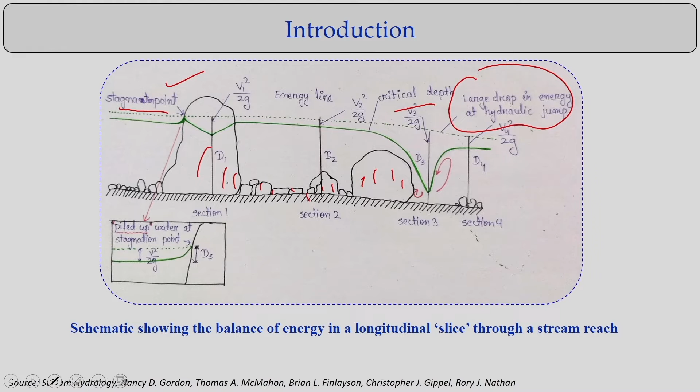Because of this resistance, we have turbulent structures and energy dissipation, which we can consider in terms of how bed roughness plays a role in creating turbulent structure as well as energy dissipation. But more details we can look at now are the critical depth and hydraulic jumps, which are quite related to each other.

Before that, you know from fluid mechanics that the flow Froude number is the ratio between inertia force and gravity force. If I consider a channel having flow depth h, velocity v, and area of flow a, under these conditions I can find the inertia force will be rho a v squared.

Rho into q is the mass flux, into v is the momentum flux, which is equivalent to the inertia force for a flow when you have depth h moving with velocity v and area of cross section a. We can find the momentum flux will be rho a v squared, which is the inertia force divided by the gravity force.

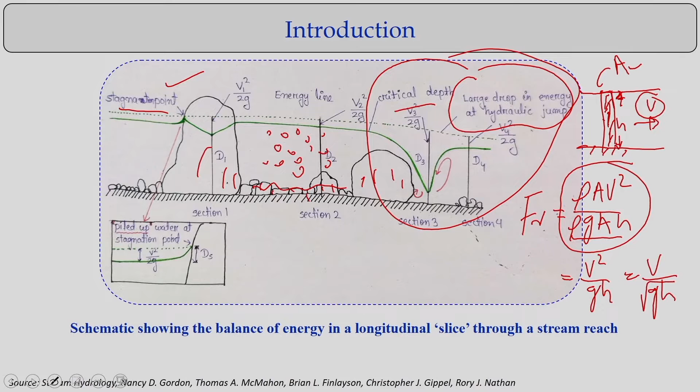If you have these components, you get v squared by g h, or v by root of g h. Please remember, it's a ratio between two force components, the inertia force and the gravity force component, considering the fluid mass moving with uniform velocity v and flow depth h, and you try to find this relationship.

So when the flow Froude number is greater than 1, or the flow Froude number is equal to 1, what does it indicate? That is the condition where the gravity force is equal to the inertia force.

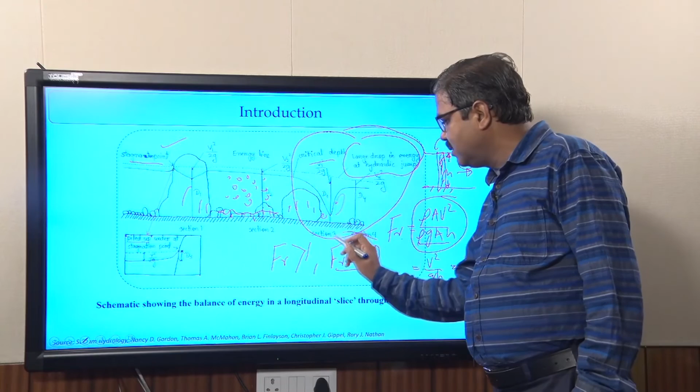That condition happens when you have critical flow, or the flow Froude number is equal to 1. But if the flow Froude number is more than 1, the inertia forces are larger than the gravity forces. The interpretation is that when flow Froude number is greater than 1, inertia forces are larger than gravity forces, and that is the condition when you have supercritical flow.

Just the reverse, when you have a flow Froude number lesser than 1, you can interpret it in terms of gravity forces and inertia forces. Inertia force is nothing else but momentum flux, considering a smaller control volume having flow depth h and cross-sectional area A, moving with velocity v.

You can easily derive the ratio between inertia forces and gravity forces. That's what gives the definition of the flow Froude number, which is discussed in fluid mechanics books, but let me explain it here.

In open channel flow or river flow, you can have a stretch with subcritical flow and a stretch with supercritical flow. During the transition from supercritical to subcritical, you will have hydraulic jump formations. That's the region where you have high energy dissipation.

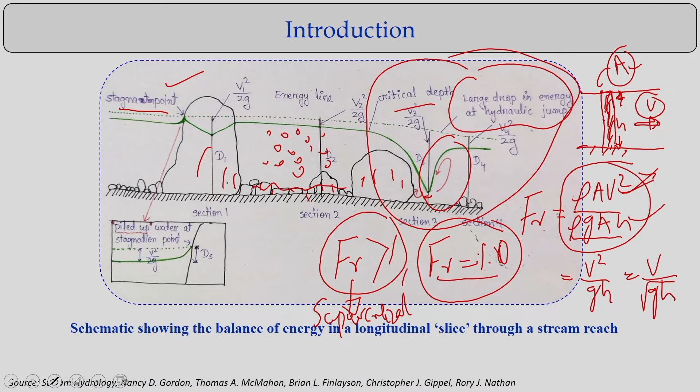So we use hydraulic jumps as a design for energy dissipation or for creating turbulent structures for mixing of fluids, or fluid and sediment mixing. We try to use a hydraulic jump as an energy dissipator, or as a mixing mechanism in flow systems. That's how we use the hydraulic jump concept.

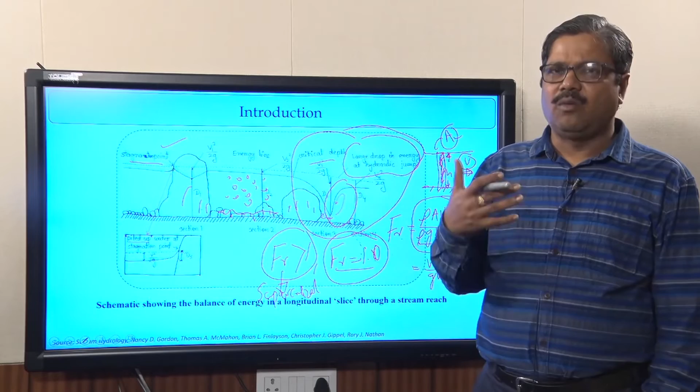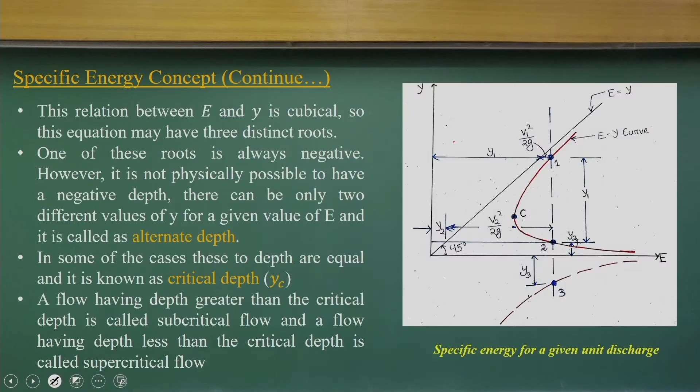But in the case of rivers, we try to understand where hydraulic jumps occur and what is the amount of energy dissipation because of the hydraulic jump formation. Let's go to the hydraulic jump part, which connects to what we already discussed about specific energy. The hydraulic jump happens when a supercritical flow changes to a subcritical flow.

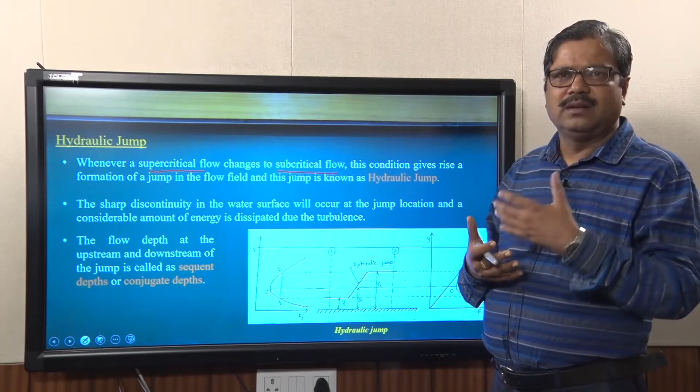In terms of flow Froude number, in supercritical flow the inertia forces are larger than the gravity forces. When that changes in terms of force, that's the mechanism that happens from supercritical to subcritical. In supercritical flow the velocity is higher and the depth is lesser. That is the condition under which hydraulic jumps form.

So there are these points. Look at the specific energy curve. If I consider y1, the energy at this point is this, and y2 is the energy here. There is an energy loss in this hydraulic jump.

There is noise, or sound production by heat energy and turbulence energy. All of this works to dissipate energy in the formation of the hydraulic jump from supercritical to subcritical. Basically we call this the sequent depth or conjugate depths. That's the theoretical point.

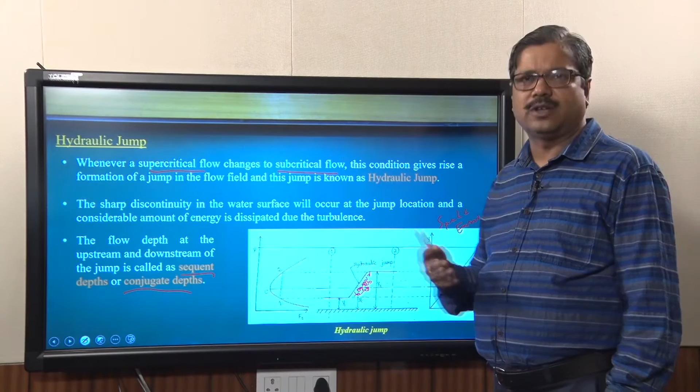I look at these hydraulic jumps as part of the specific force concept. When you consider the specific force concept, I can use a control volume like this. So when I use this control volume, we try to look at what force is acting on the control surface.

In this case, on this surface there is no force acting, and on this surface there will be frictional forces. The frictional force acting in short reaches we can consider to be zero, or negligible, not significant. If that is the condition, and here if I consider the pressure distribution to be hydrostatic, it is quite valid if there are no curvatures of the free surface -- we can assume a hydrostatic pressure distribution for this flow.

So we have hydrostatic pressure distributions. I know the pressure distribution, I know the momentum flux coming in here as y1 v1 and y2 v2 -- I know the velocity, I know the depth, and if I consider unit width, I can find the change of momentum flux happening in this direction.

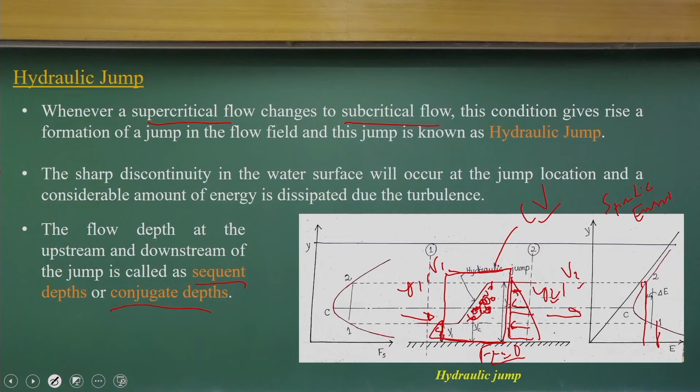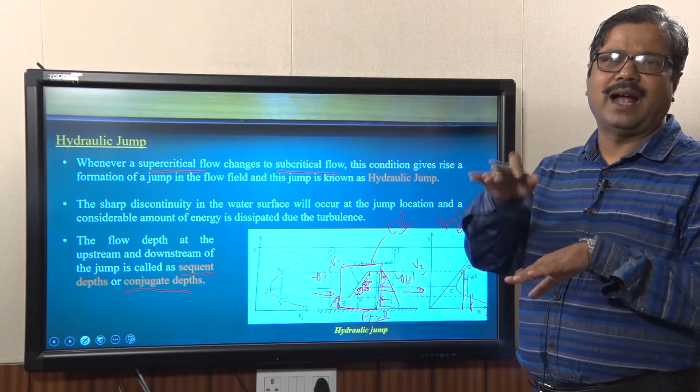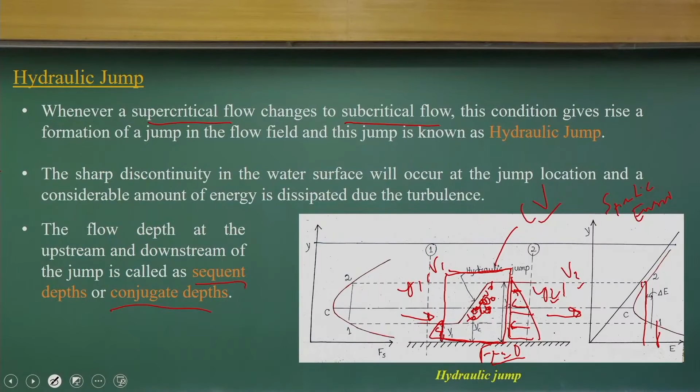That should be equal to the net force acting along this direction for this control volume. So if you apply that, what forces do we have? The momentum flux, the rate of change of momentum flux, and the hydrostatic pressure distribution -- because we have neglected the frictional force components, and there is no significant force at the interface between water and air, so we can neglect that. So we have only two force components. That is the concept called specific force.

If you look at it that way, let me again sketch the control volume and equate the force components.

If I look at this, this is the momentum flux component, and this is the component because of hydrostatic pressure distributions at section 1. That will be equal to the force component per unit weight due to the hydrostatic pressure distributions at the two locations. That relationship is nothing else but the linear momentum equations.

When we apply this for these control volumes, we get that force component per unit weight. If I define it, that is called the specific force.

What we are looking at here is these control volumes where the hydraulic jumps happen. We apply the control volume, we apply linear momentum equations, and since we consider there is no significant frictional force acting on this short reach, we can write the force terms in the linear momentum equations in terms of two components.

One is the linear momentum flux component per unit weight, and the pressure force component per unit weight. That represents the equivalent force component at sections 1 and 2, which we are equating. This is nothing else but the application of linear momentum equations for this control volume, and per unit weight, that is defined as the specific force.

So this indicates that if we consider a free surface flow where we have hydraulic jumps, we can easily find there are no significant other forces present. So we can use a very simple concept: the specific force at section 1 and section 2 should be equal.

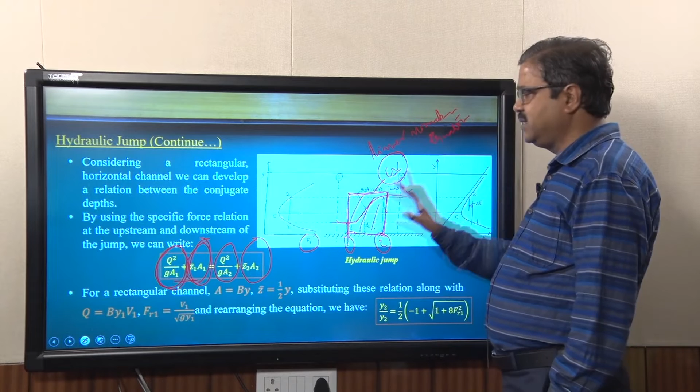The specific force will be the same, but there is energy loss due to the hydraulic jump. In the specific energy diagram, locations 1 and 2 will be at different positions, but in the specific force diagram, the specific force at 1 will be equal to that at 2.

So in case of hydraulic jumps, we use the specific force concept, derived from the linear momentum equations, because we know there are no significant other forces. We simply equate the momentum flux and pressure forces, which gives us the specific force at section 1 equal to section 2.

If you equate that and use simple geometric relations for rectangular channels, like area equals B into Y, and find the centroid or pressure centers, and use these equations along with the continuity equation...

...in terms of the upstream flow Froude number, we can find a relationship between Y2 and Y1, which is a function of the upstream flow Froude number. This is very simple - just using linear momentum equations, mass conservation equations, and the definition of flow Froude number upstream at section 1, before the formation of the hydraulic jump.

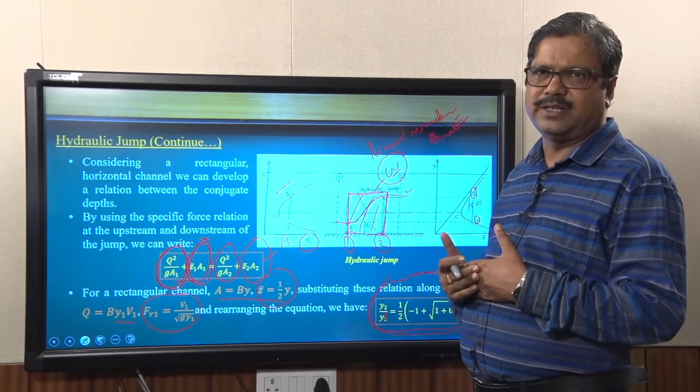Using these two equations, you can modify it to get a relationship between Y2 and Y1 - the depth before the hydraulic jump and the depth after the hydraulic jump. This relationship is a function of the upstream flow Froude number.

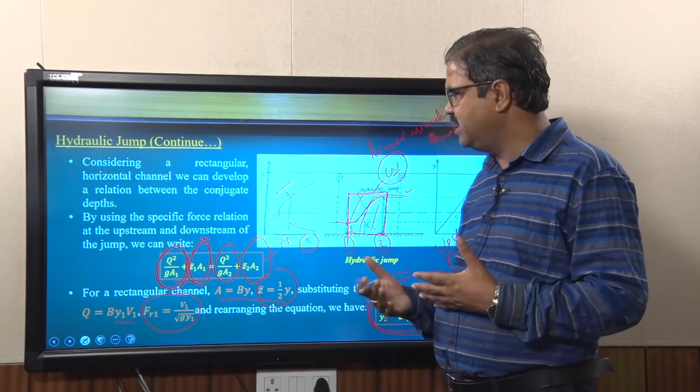Upstream flow Froude number. These are very simple concepts - we are only using linear momentum equations, mass conservation equations, and the definition of flow Froude number to derive these relationships.

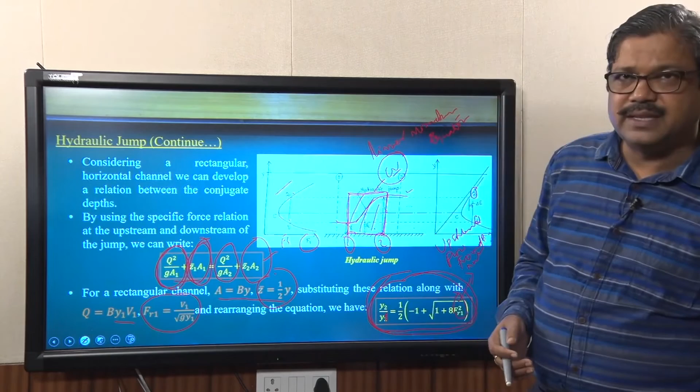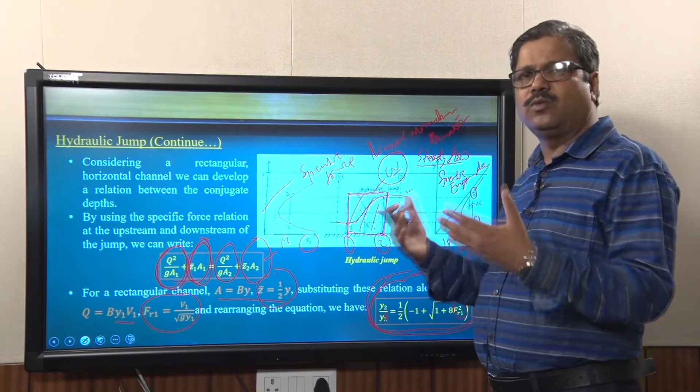These are very easy things, and whenever you solve steady flow problems, you should draw a specific force diagram and also a specific energy diagram. With these two diagrams, you try to interpret what happens pre-hydraulic jump and post-hydraulic jump, using simple tools of linear momentum equations for the control volume and mass conservation equations.

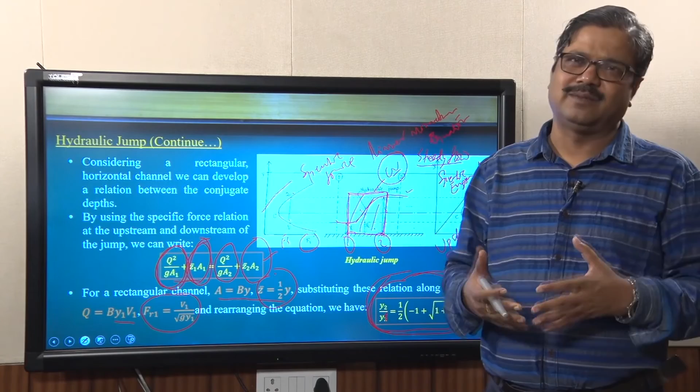We have not used any new concepts except the basic principles of mass conservation, linear momentum equations, and energy conservation for the control volume. That is what we are doing for a very simple problem - flow in an open channel where the hydraulic jump occurs.

Let us have a very simple problem to solve. A 4.5 meter wide rectangular channel carrying a discharge of 15 cubic meters per second at a depth of 3 meters.

There is a step rise of 0.25 meter in the bed. Given these conditions, determine the flow depth downstream of the step. Does the water surface rise or fall at the step?

If you look at this problem, it's quite easy. There is a rise of the bed, which could be due to sedimentation or man-made structures like a weir - the bed rises naturally or artificially. In that case, we can use the specific energy concept, assuming energy dissipation is not significant. So I can use the specific energy at two sections, section 1 and section 2.

I can compute the specific energy at section 1, and at section 2 the specific energy will be lesser than E1 because of the rise height of 0.25 meter - that's why we get this E2 value. Knowing E2, from that substitution I get a relationship between Y2 and A2. There are two unknowns, and A2 is a function of Y2, since B is known to us.

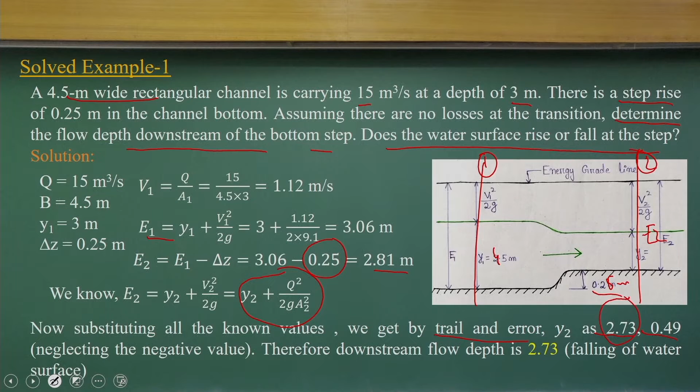Given these conditions, we can use a hit and trial method because this is a quadratic, actually a cubic equation level, and we compute it using hit and trial. It will have three values - one will be negative, which we don't consider, and another is 2.73. One may ask why we consider 2.73 and not 0.49.

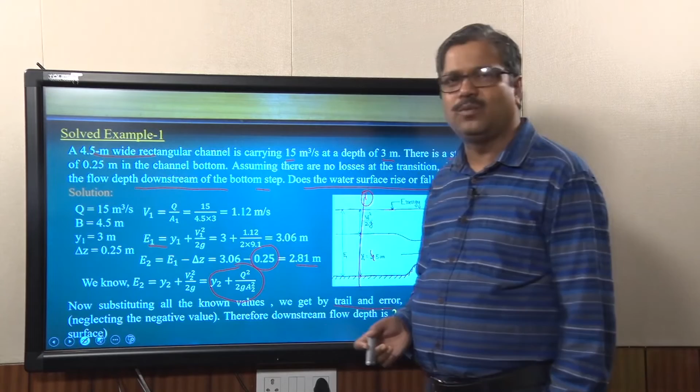That's the same concept I used earlier in the specific energy discussion - we should know whether the flow is subcritical or supercritical. If the flow is supercritical, the water level will rise. In the case of subcritical flow, there will be a decrease. In this case, knowing the upstream flow Froude number, we can compute it and find the flow is subcritical. That's why the depth will show a falling of water at the step. Just try to solve that - numerically it's quite easy.

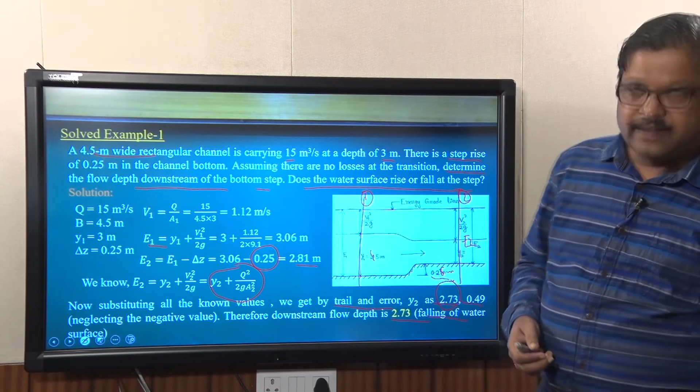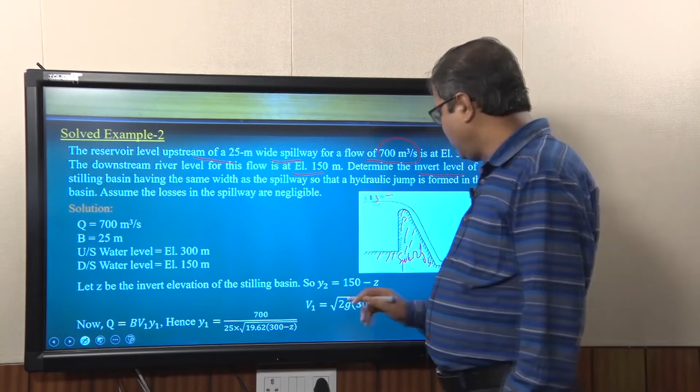If you look at this curve, it shows that the Z level at this location is unknown to us - the stilling basin bed level elevation, the invert level Z, is unknown. Given that, what could it be? If you have 150 meters minus Z, that is Y2. So you can compute V1 values - you can compute this because you know the discharge.

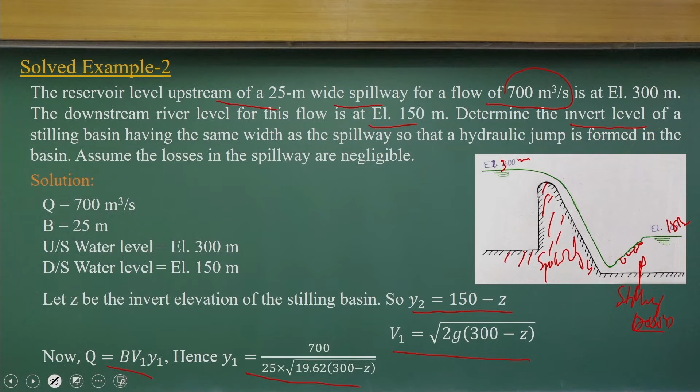So you can compute what could be the V1 value. Substituting that, you have a mass conservation equation, and you can compute what will be the Y1 value, because you know V1, in terms of Z. Then we substitute into the relation the same way - the upstream flow Froude number can be written in terms of V1 velocity, giving a relationship between Y2 and Y1, which relates to the flow Froude number. These equations are functions of Z, but you can see it is not a linear equation.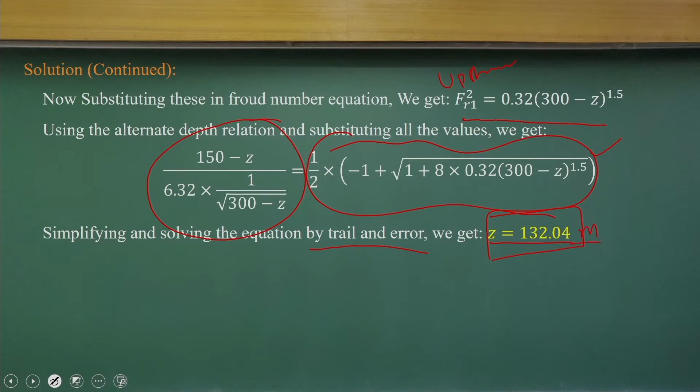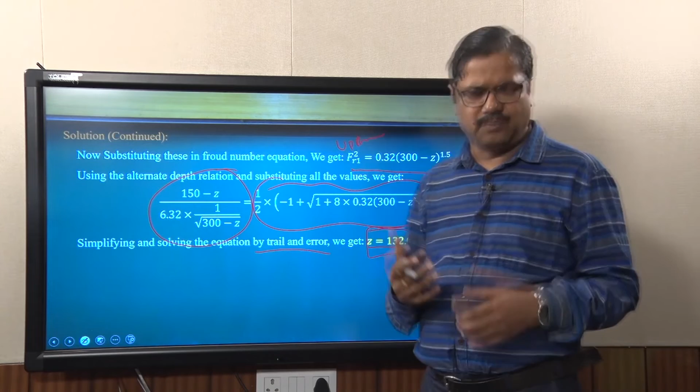So you have to do a hit and trial. There are a lot of tools nowadays available, you can use hit and trial methods to find out what could be the Z value. In this case it just comes out to be 132.04 meters. So this type of typical example we can do for energy dissipation in the downstream of a dam, or energy dissipation in rivers, if you know the flow characteristics, assuming it is a steady flow.

Now, if you look at this part, I will tell it conceptually, because this is supposed to be discussed in open channel flow, and since we are talking about river flow, it is just rectangular channels we are having discussions on, which already we have covered. If you are considering rectangular channels, you have a hydrostatic pressure distribution, and you consider a uniform velocity distribution.

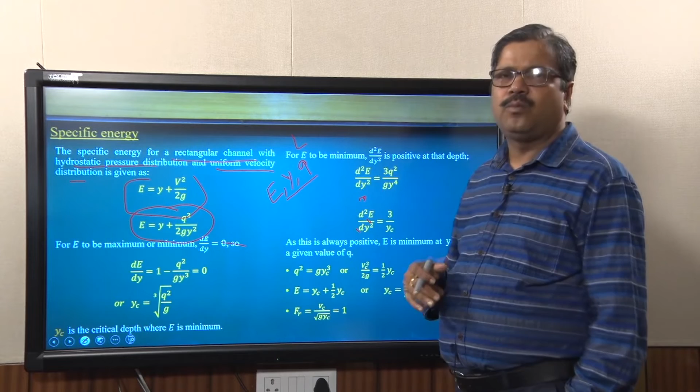So we can define the specific energy, this is just a repeat of that. Now we are using these functions. As I said earlier, in a flow we have three cases: one is specific energy, second is the flow depth, Q is the flow discharge per unit width. So basically what we are looking at is which location will have specific energy minimum. That is a very simple thing.

We know E is a function of Y and Q. If I consider Q as a constant, at what Y depth should we have E minimum? If you look at this, it is very easy because it is a quadratic equation. E has a relationship with a quadratic equation in terms of Y and Q, with Q considered constant. So using basic calculus, you find dE by dy equal to 0, and the function will be maximum or minimum at that point. That is what you compute and find that yc comes out like this.

Same way, for it to be minimum, the second derivative of E with respect to y should be positive. That is what you equate and find is always positive. And if you substitute all of this, you will find that E equal to minimum happens only when the flow is critical. That is what we did. Graphically we present this in the specific energy curve, as we discussed.

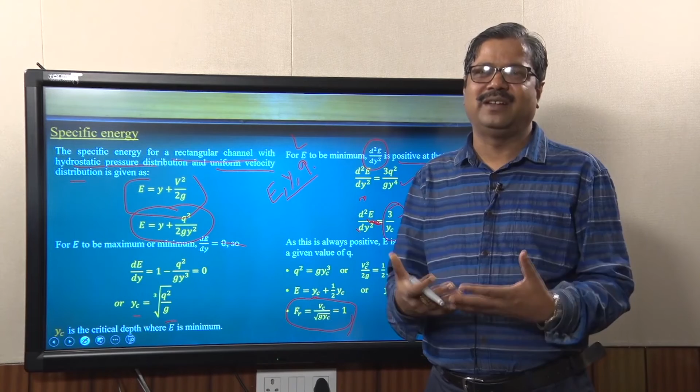That is the same concept we derived in the specific energy curve; the same thing we have given in terms of mathematical justification. Now let us discuss, as I said, we look at the specific energy, y, and Q.

So now if I consider E as a constant, that means I am considering a channel where energy dissipation is not happening yet, or is not that significant. The flow will vary with variations of y and q, where Q is discharge per unit width. That means if the same amount of capital Q is coming as the channel is expanding, the Q value at this point will change. Assuming there are no energy losses, we adopt the basic concept that if Q is varying, what will be the relationship with Y? Whether we can get a maximum discharge, the Q value, the maximum discharge value for a particular specific energy - that is the concept we are looking at.

The same way, now we are looking at the same specific energy equation written in terms of Q, the discharge per unit width, which we also define as unit discharge. Again, we said that when depth equals 0, Q equals 0, no doubt about that.

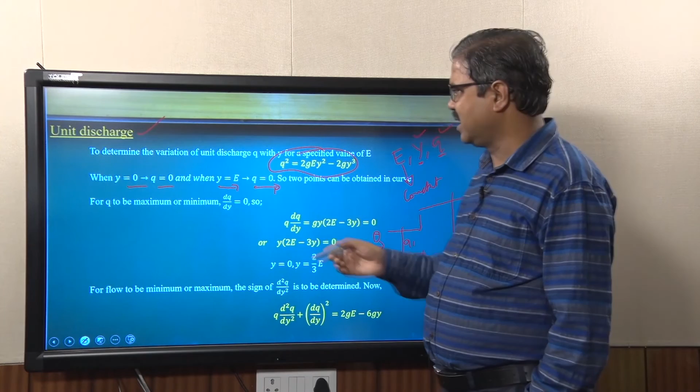These two points can be obtained in the curve, so we know these values. We are just looking at where it will be the maximum or minimum. So we try to look at the first derivative of Q with respect to Y, and the second derivative. If you compute the second derivative, it's the same equations, we are just rearranging and resubstituting, and we look at the second derivative part to determine whether the flow rate is maximum or minimum.

What we interestingly found is that if I draw the Q values and the Y values, we get a typical curve like this for a constant specific energy. As we discussed, the specific energy will be E1 when Q equals 0. So that is the two points you will have.

From these derivations, we can find out Q will be maximum when Y is equal to 2/3 of E1. That is from simple derivation you can find out. So in this curve, at the 2/3 location you have this value, and this is where Q is maximum. Beyond that it is not possible.

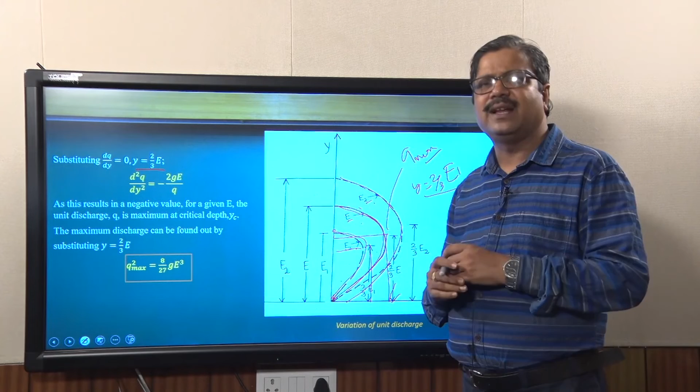So that means if you are taking a channel and the specific energy is constant, or energy dissipation is not happening, there will be a critical point or critical flow depth where Q will be maximum, and Y will have a relationship like this: 2/3 of specific energy. Simple derivation, if you substitute values, you get Q max as a function of specific energy, which is very easy to derive.

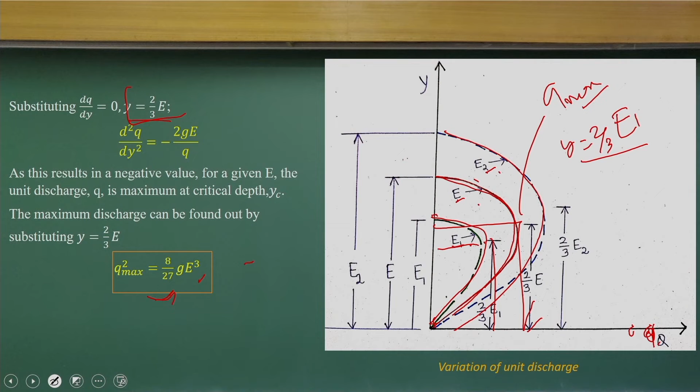So we can draw this curve and remember how E, and for a constant E, how Y and Q, the unit discharge variations, are related. That is the relationship we have derived here.

Now let us discuss a very interesting concept: we know basically that critical flow occurs when the gravity force equals the inertia force. That concept we know. But how can you know there will be subcritical and supercritical flow in a river flow system?

Most often river specialists say you go to the bank of a river and throw a stone to create a disturbance, then look at the propagation of that disturbance - whether it moves upstream or downstream, or whether it propagates in both directions. Based on that propagation, we can identify whether the flow is subcritical or supercritical.

We should discuss the critical flow concept with respect to disturbance propagation. As river flow happens, immediately there is a wave - huge runoff comes and creates a wave as a disturbance. How does that propagate, and in what direction? Based on that propagation, we can find out whether the flow is subcritical, supercritical, or critical flow. That is the concept we will discuss.

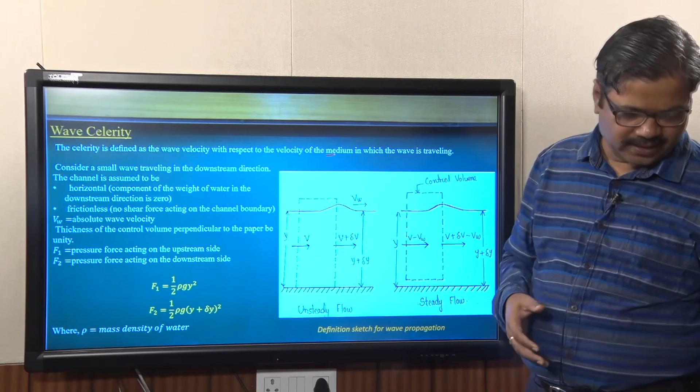As I said, just by throwing a stone in a river we can find out whether the flow is subcritical or supercritical. Let us go for simple derivations - for more detail you can refer to the open channel flow book by Hanif Chaudhry. But let us have the concept of celerity, also called wave celerity. It is defined as the wave velocity with respect to the velocity of the medium in which the wave is traveling.

Again, I am just repeating that we talk about celerity - celerity means the wave velocity with respect to the velocity of the medium. We create a wave and try to find out the wave velocity, where the velocity of the medium is the flow in which the wave is traveling.

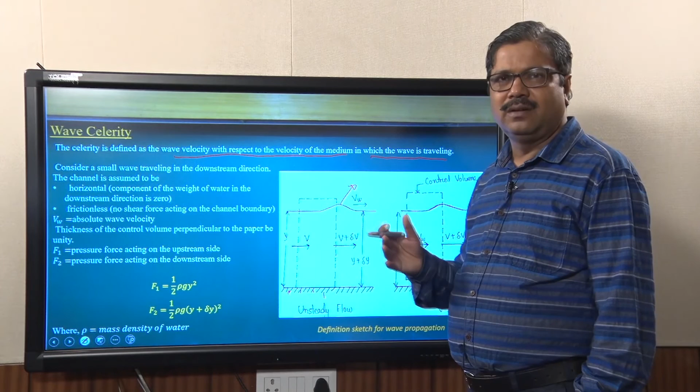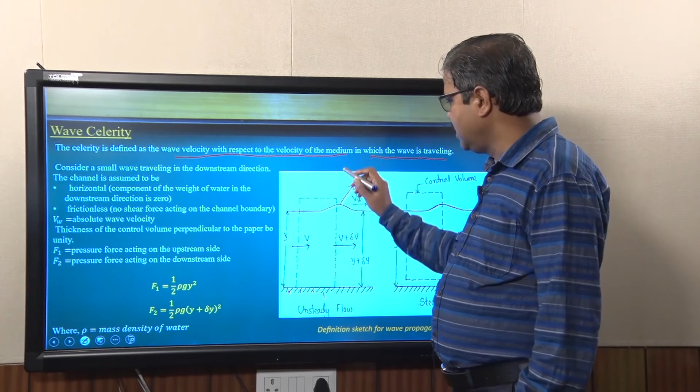That velocity we call the celerity. If you look at these cases, we have the channel flow and we have created a small disturbance, a small wave. We try to look at what happens to this disturbance we have created. If there is a delta y depth, suddenly there's an increase in the delta y depth, and you have the cross section like this, y plus delta y depth. If I have a delta y of depth, with y depth here upstream, and you create a disturbance like this, we're talking about the wave celerity, which is Vw.

What is the wave velocity with respect to the medium? The medium is moving with velocity v, and because of this change in the wave, we have a change of velocity equal to v plus delta v. There is an increase in the velocity. Similarly, there is an increase of flow depth from y to y plus delta y. So if these are the conditions, this is an unsteady flow condition. What can we do?

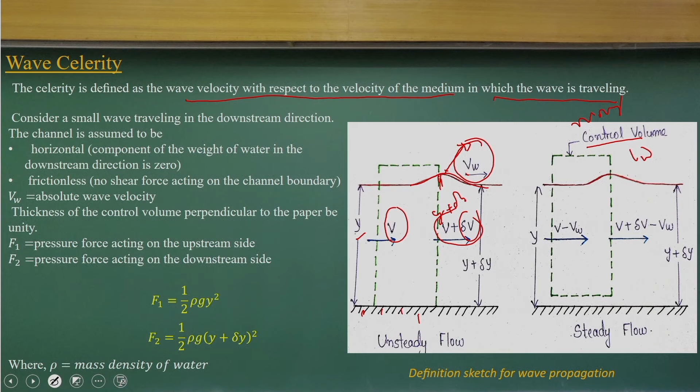We can consider a moving control volume with Vw. Moving a control volume with Vw, the problem becomes a steady problem. It's quite easy now. Neglecting the friction forces, we can use this control volume for mass conservation and the linear momentum equations to get what would be the Vw value.

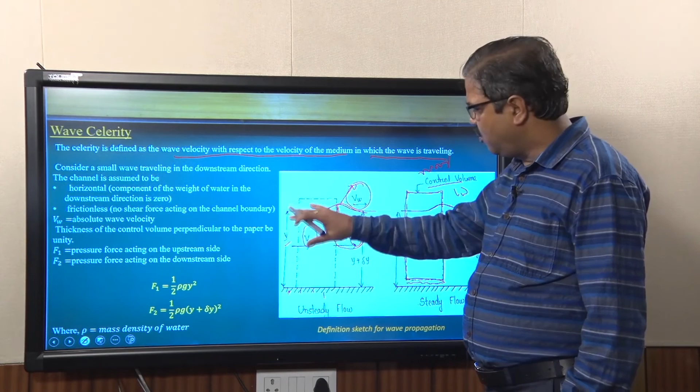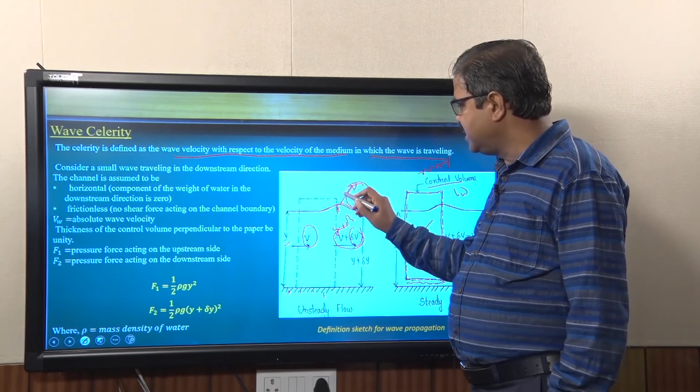That's the basic idea. Again, I want to repeat: we consider a disturbance or wave in a flow where you have a velocity v and u, and because of the disturbance, the flow depth changes from y to y plus delta y, v changes from v to v plus delta v, and let Vw be the wave velocity moving on this. To consider this unsteady problem, we consider a moving control volume with Vw velocity, and we change the relative velocity components, with y depth and y plus delta y depth.

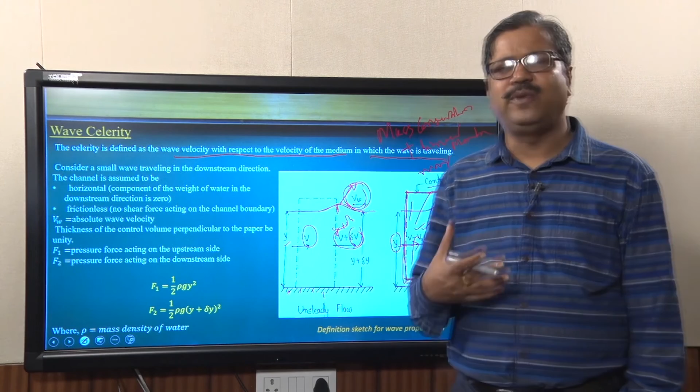For this control volume we apply mass conservation and linear momentum equations, to know what is the relationship between Vw with V and Y. That's the basic idea, whether we can establish the relationship between Vw and Y.

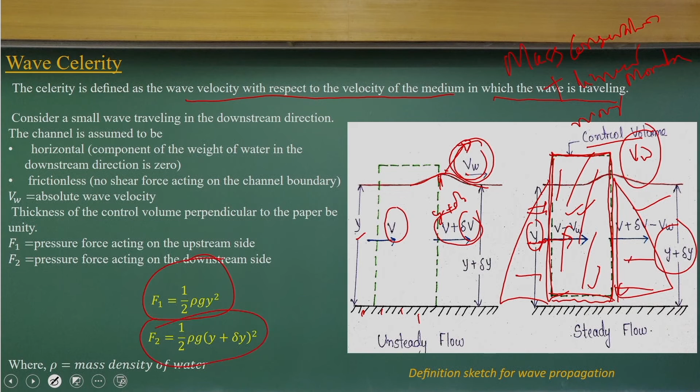Here again we have considered hydrostatic pressure distributions. If you look at the force acting on the upstream side and the downstream side, you can use the hydrostatic pressure distribution for y depth and y plus delta y depth. That is what we can compute, the amount of force acting as a pressure force onto this.

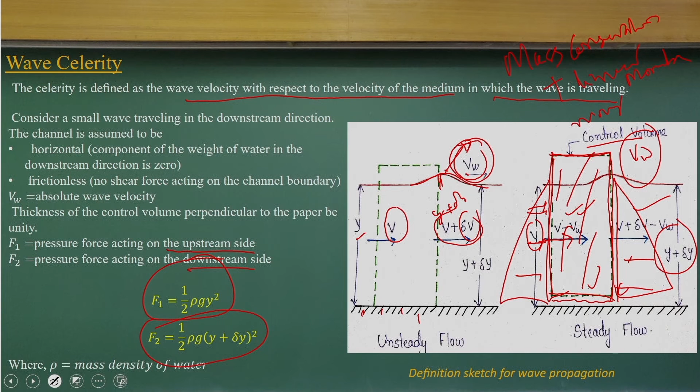So the net force acting in these directions, neglecting friction forces, gives you this part, which will be equal to the time rate of change of momentum flux. So we find the relative momentum flux and the mass flux. This is the mass flux, and finding the change in velocity at upstream and downstream, that gives the momentum flux. Using force equals momentum flux, you get these equations.

These are simple derivations, and if I neglect the very higher order terms, like multiplications of delta y squared or delta v and delta y, because these are higher order terms, since delta y is small, delta y squared will be very, very small. So, neglecting the higher order terms, these equations come out to be much simpler. It looks very complicated here, but neglecting these higher order terms, we can simplify to these ones.

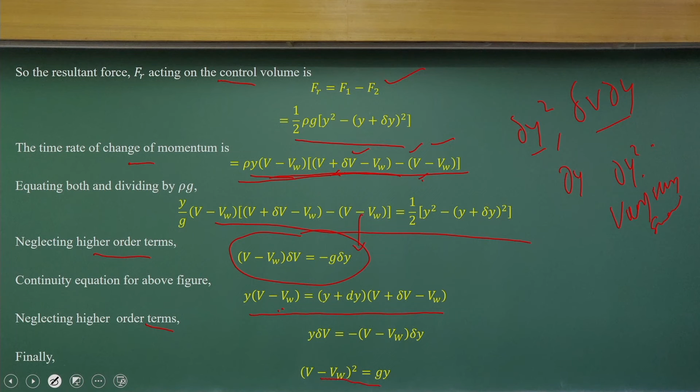Now we use the continuity equation, mass flux in, mass flux out, for this moving control volume. Again neglecting higher order terms and combining, we finally get this relationship between v, the velocity, y, and Vw. If I rearrange it, I get Vw equals v plus or minus root of gy, and c stands for the celerity. So the celerity comes out to be c equal to root gy.

So, if you try to understand it, when you have the flow Froude number V by root gy or V by c, you can understand what happens to the flow Froude number. It is a very simple thing I try to show you. If you look at it, the flow Froude number is equal to 1 when the wave celerity, the speed of the wave, is equal to the flow velocity. Then we have the conditions we call critical flow.

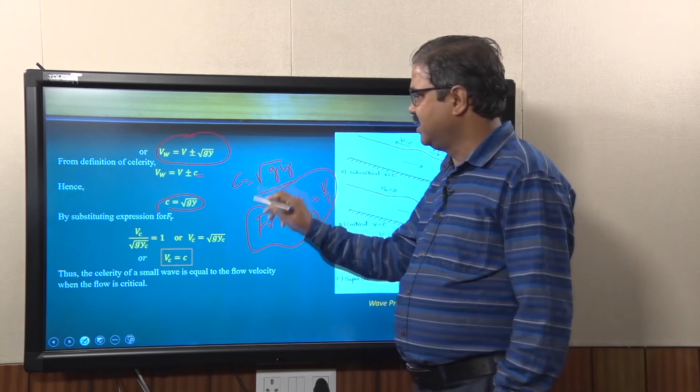Earlier we discussed that the flow Froude number is a ratio between inertia forces and gravity forces. Here we are talking about the same concept: critical flow happens when you create a disturbance, and that disturbance speed and the flow velocity are equal to each other, then you will have a flow Froude number of 1. So in terms of wave celerity, we are defining the flow Froude number.

Just try to look at how the wave propagates. In case of subcritical flow, since V is lesser than C, you will have a negative component and a positive component. You will have an upstream direction and also downstream. That's what happens in subcritical flow. That's the reason when you throw a stone, you can see the propagation of the wave in both directions, then it is a subcritical flow.

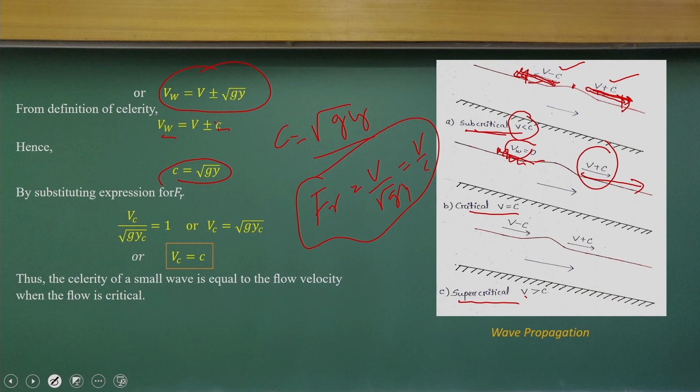But if you look at supercritical flow, both cases will be positive, because as V is greater than C, these two roots, V plus C and V minus C, will both be positive. That means in case of supercritical flow, we will have wave propagation both directing downstream. That means whatever disturbance you do, it propagates downstream. But from the flow point of view, when you have supercritical flow, that means it is upstream controlled, because whatever you do from the upstream is propagated to the downstream. So supercritical flow we call an upstream control system.

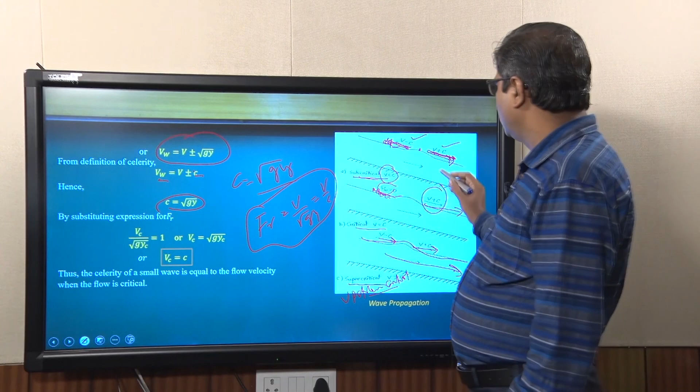But in case of subcritical flow, if you create any disturbance, it moves both upstream as well as downstream. That means it can start from the downstream to the upstream. That's the reason it's called downstream control, because this information is necessary when you do river modeling, whether flow is subcritical or supercritical.

Critical flow does happen, but it happens in very rare conditions. Many times the river flow is considered subcritical turbulent. Please try to remember that most river flows are classified as subcritical and turbulent flow.

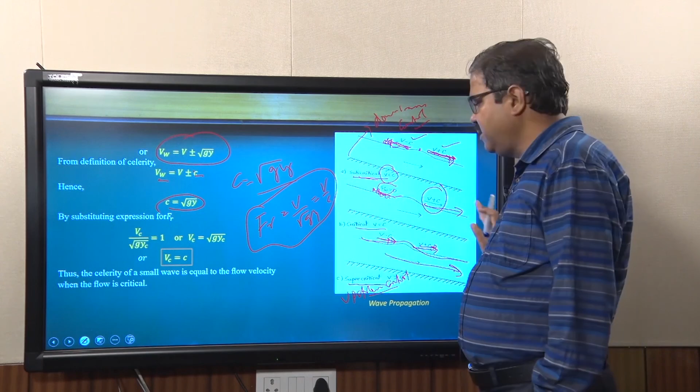So there is no laminar flow, and in some cases, like if there is a sudden hydraulic drop, a relief, or a gorge, there could be the formation of a hydraulic jump and supercritical flow. In those conditions we can see it will be upstream controlled. The disturbance will propagate only in the downstream direction, so anything you control upstream affects the flow. That's the way we define it.

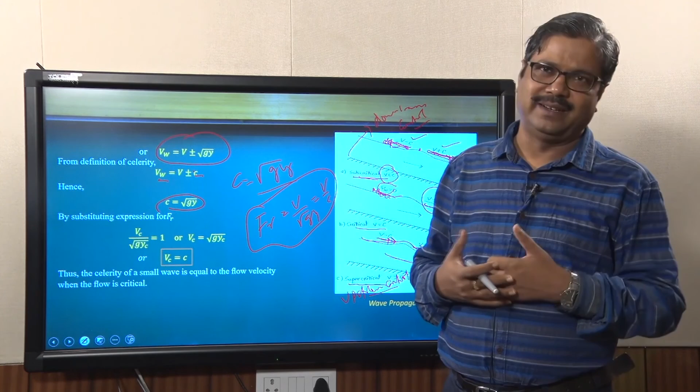That's in terms of flow behavior, we can understand whether it is subcritical, supercritical, or critical flow with respect to wave celerity. So we defined it in terms of wave celerity. With this, I conclude this lecture today.